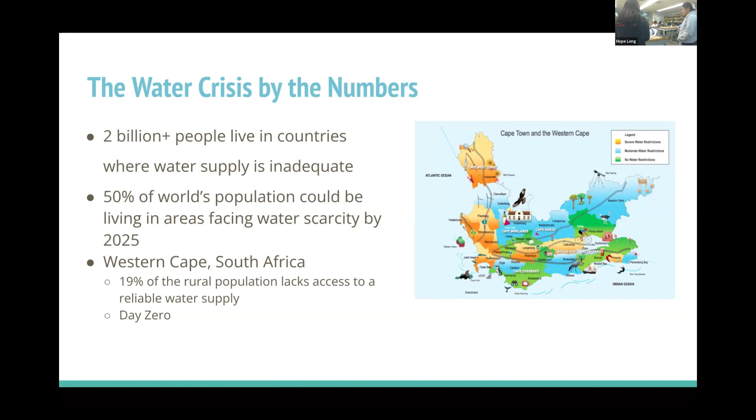So there are some other options, such as using a desiccant wheel, which is this giant industrial wheel with desiccants embedded into it that basically spins and condenses, but this uses a lot of energy input, and these are very large scale commercial products. What we have here is scaled to 1 kilogram of desiccant. For reference, what we have in front here is around 200 grams. A lot of these wheels claim they can output like 700,000 liters of water per day, but these are huge machines that take up an entire room.

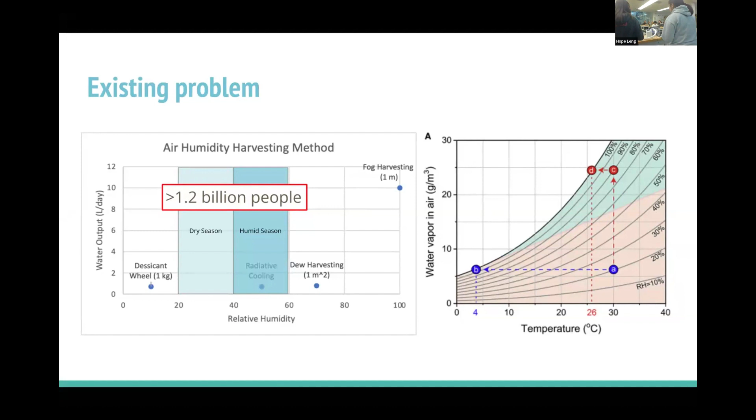So what we're targeting is this region in the middle where there's not great technologies currently. And this region, it might seem like, oh yeah, why do we care? But more than 1.2 billion people actually live within this region and have water scarcity issues. So that's what we were hoping to target, especially given this graph of temperature versus relative humidity, we're targeting semi-arid regions.

So what do we actually want? We basically want a highly portable design. As you see, we can just transport it really easily from the back of the room to here. A highly modularized design that is essentially biphasic, or bimodal in some sense. So we wanted it to operate both within the arid seasons as well as during the humid seasons so that people have water year round.

So part of it is we're going to rely on a metal framework or iron mesh where you basically just fold it into the wave structure, hence the name WAVE. So that could just be in the box during the relatively humid seasons where we don't actually need any additional input. Basically, you just put the mesh out there, it gathers water, you collect the water.

However, during the drier seasons, we're going to implement desiccants that are then overlaid over it, such that you can take them off, put in as many as you need, depending on what condition or what relative humidity you're targeting. And the whole idea there is with the desiccant, it's relying on this day-night cycle. So during night, we're basically opening this lid.

This lid comes apart where you basically just absorb water. Put this in a place where you think you have the most airflow, where you have the most relative humidity. During the day, close it. Use evaporative cooling such that the water that is captured by these desiccant beads then condenses onto this lid and then gets condensed out through this white tube, or can also just be poured out from the bottom. So we have two collection methods, one where it's just passively pooling at the bottom, one where we're actually trying to actively condense it here.

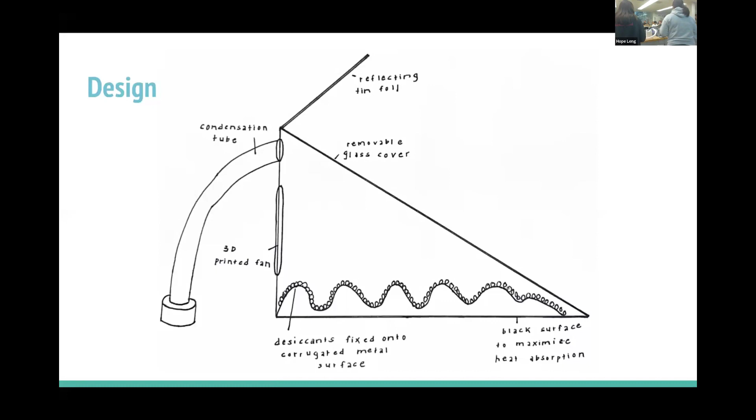So as a proof of concept, the main part of our thing relies on you have the grid and you also have the silica beads. So we were trying to think, okay, how do these beads work? So we set up this pretty simple experiment where I spiked in certain amounts of water into this tissue paper, or just that paper in the back, put it in here, and leave it there for a day, which is what our cycle is simulating.

So what actually happens? The beads that we're using specifically for our proof of concept are these color changing beads. When it's dry, it's kind of this blue color right here. When it's wet, it changes into pink. So that was after capture, and this is when we're trying to actually evaporatively heat it.

So the main goal here is we use solar heating, right? Any sort of reflective surface put on top of it makes a really easy solar oven. If you have tinfoil, that works great. If you have a mirror at home, that also works great. And what we did here is just heated it to roughly the temperature a solar oven could achieve.

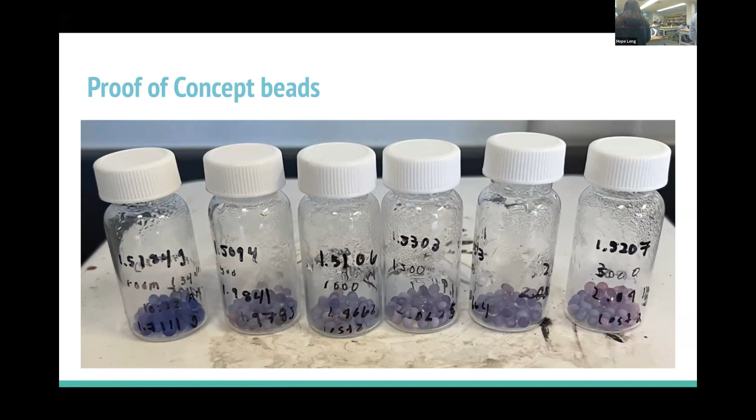And then what we see is, wow, we have condensation, and wow, the color changes back. So it basically works out. Condensation is fantastic. Yeah, there is water. We were really surprised at how much we were actually able to get out of it. It's actually quite a lot of water.

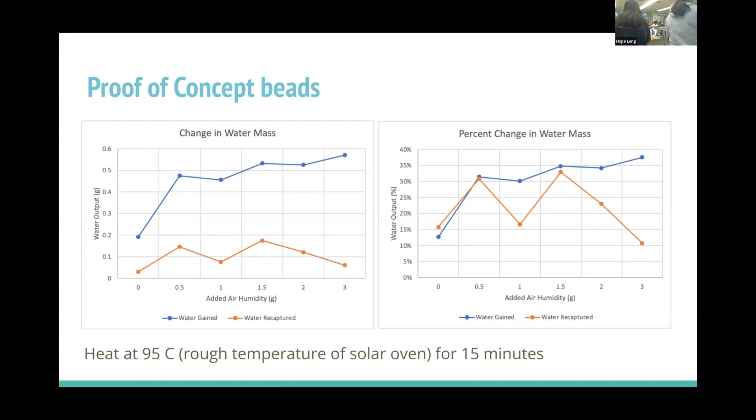For sure. So this is a really basic graph: as you're increasing in relative humidity, the water that is gained as well as the water that we're able to recapture is around 30% within this semi-arid zone. And for reference, the relative humidity here is, if you go to the next slide, roughly around this 20% to 30% range. So we're actually doing pretty well.

We're a bit below the industrial desiccant wheel, but on the scale of the household, which is what we want our device to be for, it's actually a decent amount. And as you put in more desiccant, we're expecting water output to increase as well.

And as Marisol mentioned before, we're not only trying to alleviate the health issues, it's also a socioeconomic gap in which individual households, especially in rural areas, don't have access. They have to ask these centralized agencies for water. And we're just saying, hey, can we maybe supplement that with a bit of technology in your own household?

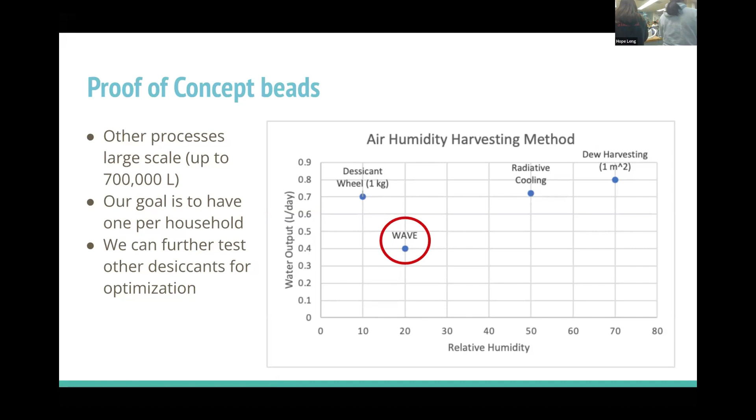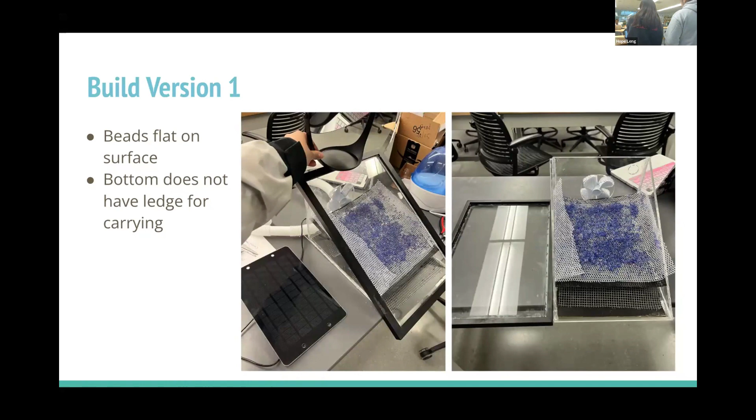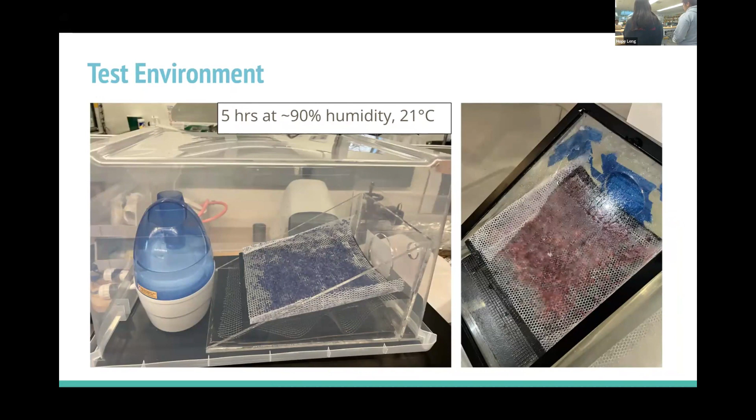Okay, so moving on to our build versions. In our first version, we just had the desiccant layer flat, and we did this for testing purposes. First we created this test environment where we put a humidifier in an enclosed box, and we kept our device in there for about 5 hours, and you can see the change from blue to pink. Let's see.

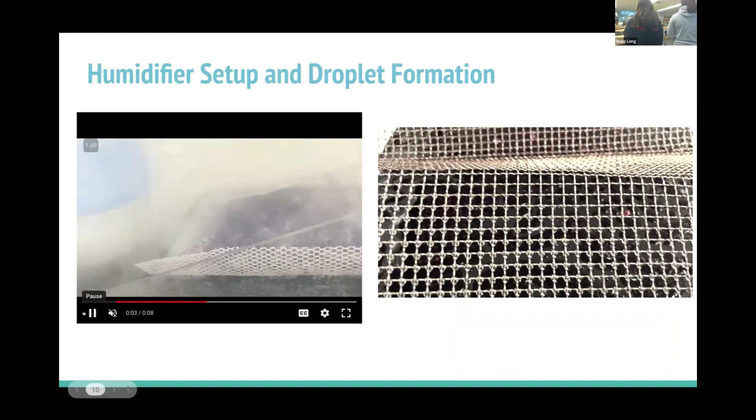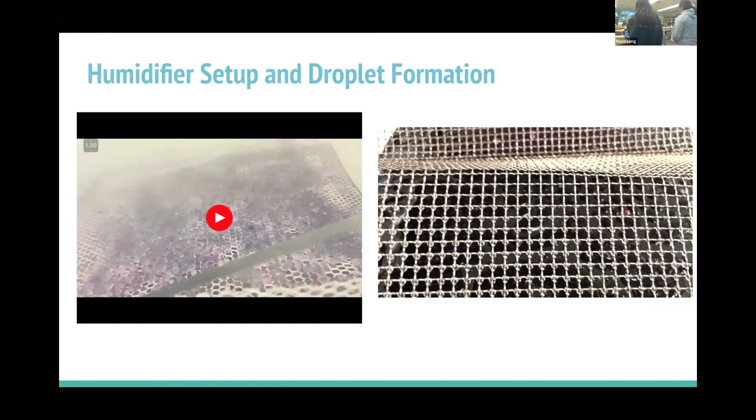This was when it was pretty humid in there. And you can see some water pooling. And then this picture on the right shows the metal. You can see the droplets formed on the metal, which shows how effective it is in harvesting the dew droplets.

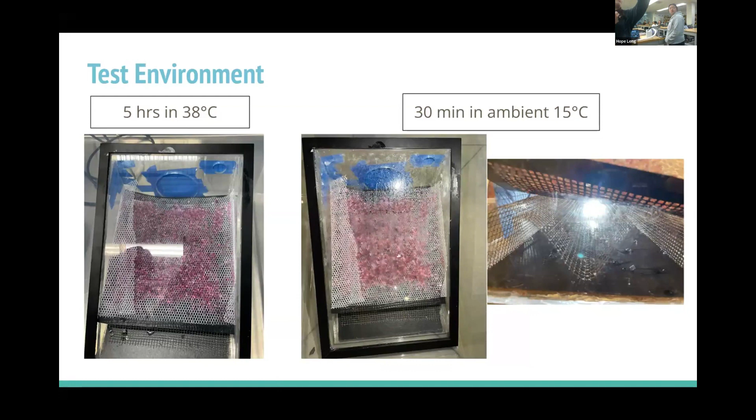Okay, so then next we took it to the hot room, and you can see that it pretty much dried up any water that was in there, and I guess evaporated it. And we took it outside. This was at night, and within 30 minutes, you could already see condensation forming on the slant of the glass as well as at the bottom where the wiring was. It's kind of hard to see, but there's water droplets on the bottom that fell from the mesh.

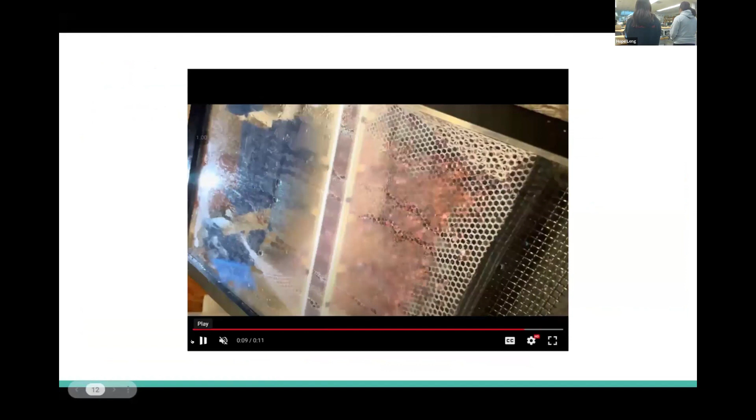This is just another video showing what the condensation looked like. So it happened pretty quickly after we took it out of the hot room, and just showed how effective the passive cooling method is. And we tried to collect some of the water, but it was a bit difficult with our setup. Yeah, at that point we hadn't used the collection.

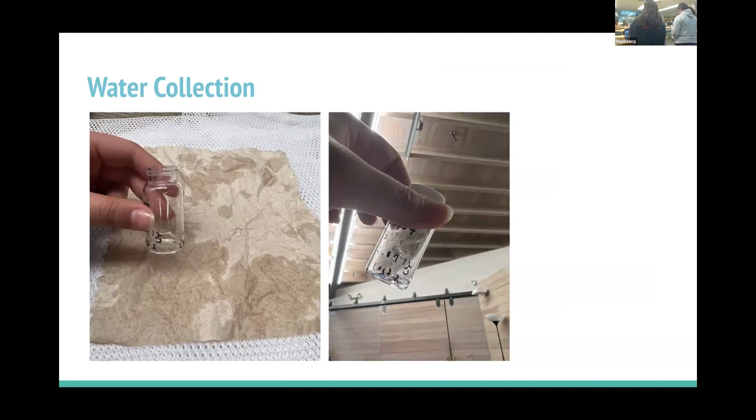Next was our second build version where we updated a few things to really maximize harvest efficiency. So we had the corrugated desiccant sheet, which increases surface area of the desiccant so we can maximize how much air the desiccants come into contact with, which is also the solar powered fan. And then having a white collection tube and collection jug to increase reflectivity and amount of time spent in passive condensation slash cooling mode. And then also having a reflector that increases the heat directed onto the desiccants to improve evaporation, which would lead to condensation.

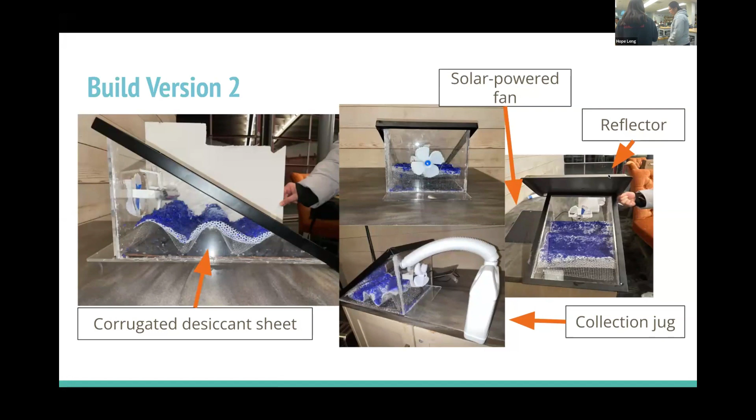And last, our next steps are to evaluate the optimal desiccant. There are a ton of different desiccant formats, and we want the most efficient one. And then also changing the angle maybe to improve collection of the condensation. Lastly, testing efficacy with all of our components combined, and also adding a filter so that the water is actually potable.

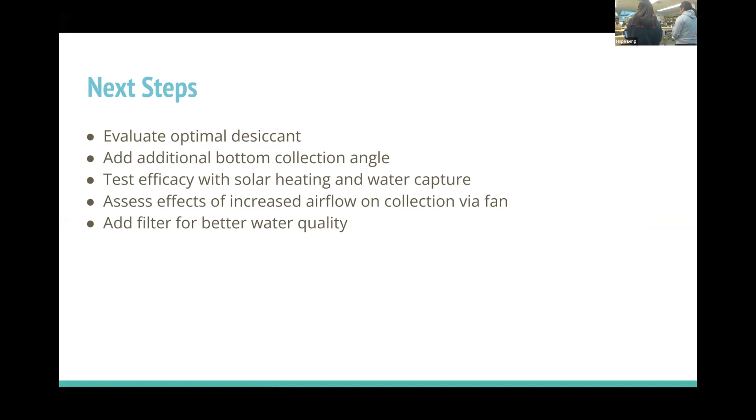It was super awesome to see those droplets. I was a little worried in terms of whether these desiccants are too efficient. Any questions?

Yeah, I think one thing to do is, this is a classic thermodynamic cycle. So you should really write this as the delta T of the total system, the delta humidity between the two systems, to be able to say, if you run it as an engine, the energy taken in, what does the power output look like? So this would be a really beautiful